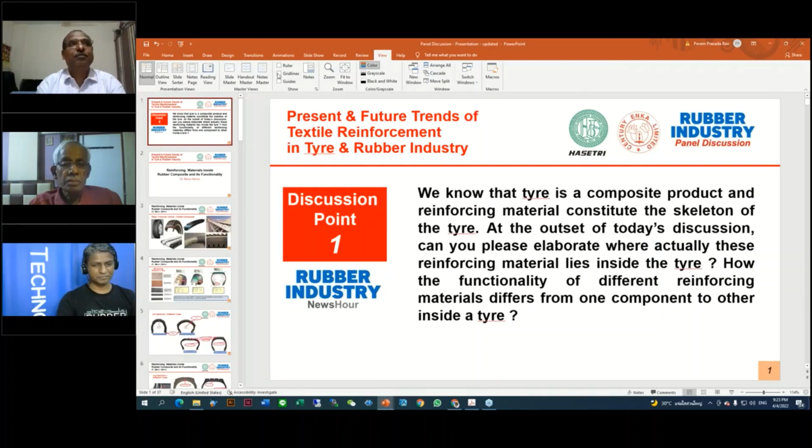Okay, HASETRI is actually the abbreviation for Hari Shankar Singhania Elastomer and Tyre Research Institute. It is currently located in Mysore, Karnataka. It is promoted by JK Tyre and Industries Limited. It is an independent research institute and a SIRO organization. SIRO means scientific and industrial research organization recognized by DSIR, Ministry of Science and Technology.

So HASETRI you can consider a one-stop solution for the rubber and allied industries. HASETRI is over 3 decades old. It has specializations in a gamut of things, for example, materials for rubber and tire industries, and also material developments. Then we have a huge gamut of tests, starting from rubber chemicals to products and full-fledged tires. We have predictive tools like simulations for rubber engineered products. And we also work on consultancy projects.

And being an independent research institute, HASETRI's laboratory is also accredited with ISO 17025 by NABL, the National Accreditation Board for Testing and Calibration Laboratories. So being NABL accredited, HASETRI's test reports are recognized internationally. Recently HASETRI was also accredited as a proficiency test provider. So in brief, HASETRI has a total basket for those who are interested in this field. HASETRI also does lots of trainings, like you also.

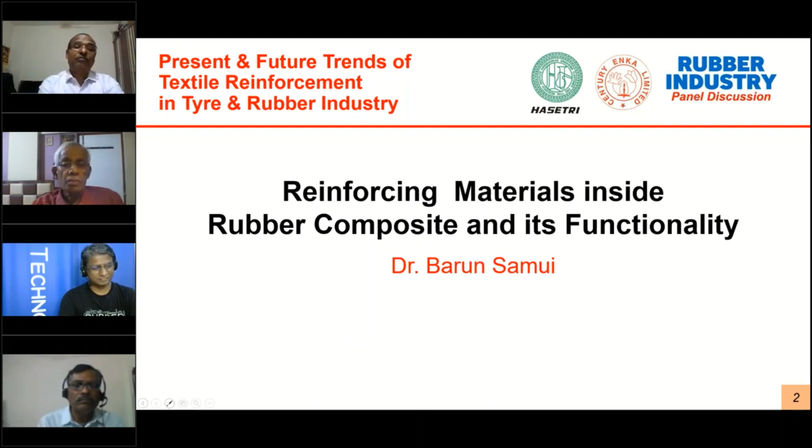We will see at a glance, these are basically some of the key rubber composite products. Today's topic will focus on the tires, but there are other products. So here's the tire, basically a passenger tire. The tire itself you can consider like a tire world. There are 30-40 varieties of tires, and each variety has an altogether different design, materials, performance, finite elements, everything is different. Starting from say a 2 kg scooter tire to a 3-ton OTR tire.

So some of the things are very common, like the reinforcing materials and rubber, but the design aspect, everything is different. So some of these key rubber composites, like passenger car, this is the section. We will discuss more on these things. The V-belt, hose, conveyor belt, transmission belts. We call these all rubber composites, but one common thing we can see even from these pictures is that reinforcing materials are inside them. So some kind of similarity is there.

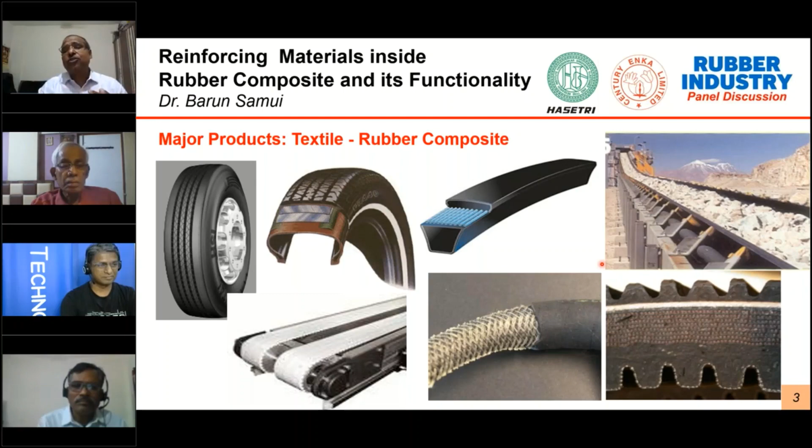So now can we go to the next slide? There we will try to show what kind of reinforcing materials. The left-hand side pictures show our reinforcing materials of today's topic, and these are pictures of the tire, trying to show where the reinforcing material lies.

So the first picture is PCR, passenger car radial tires. So here, how many varieties of reinforcing materials are there? You can see the carcass, because if it is the radial tire, many of us know the textile fabric goes from bead to the other bead in the radial direction. So if you take the longitudinal or the axial rotation, it is 90 degrees. So bead to bead fabric is there.

Over the carcass, there is the belt. It is made out of, primarily today, a steel belt. And cap ply and carcass, these are in opposite type. You know, cap ply is 90 degrees over the carcass, so it is in the rotational direction of the tires. And the other thing I have put in the circle is called a chafer, and I will come to that. And this part of the tire which gets fitted with the rim is called the bead.

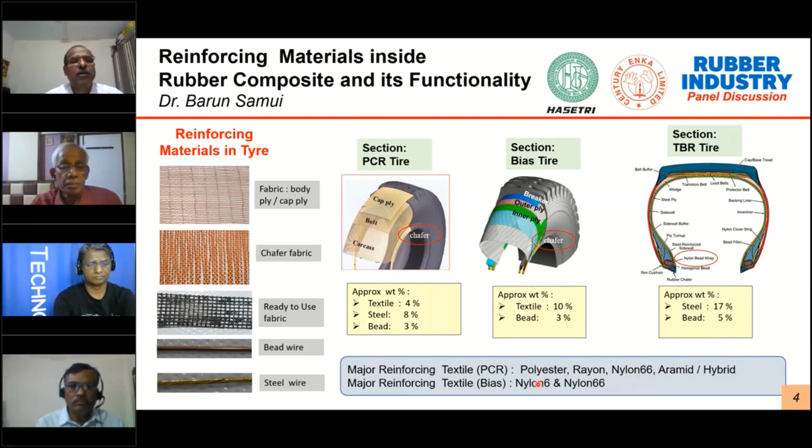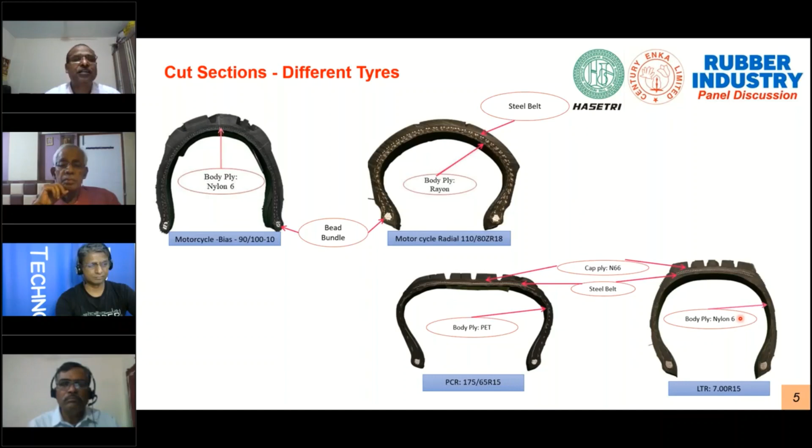Performance of the tire finally depends on this, like this, each and every component. That's the complexity and beauty of this composite that is the tire. So that's the critical role played by the chafer, which is primarily nylon. Why nylon, why not polyester? There is an answer for that: nylon is better than polyester in this particular functionality, because it has to cover that functionality. So each and every thing comes down finally to the answer of functionality.

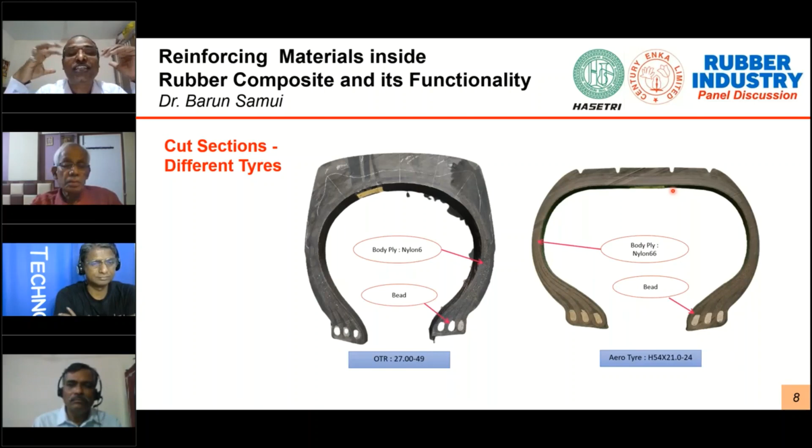When it lands, such kind of smoke and things come out, which clearly tells about the temperature and speed the rubber experiences. At the same time, it finally has to be a total integrity player. I'll touch upon this integrity in the next slide.

Let's go to the next slide. When we have so many requirements into it, broadly you can classify it into two most key and important things. One is durability - the structural durability for running lakhs of kilometers. The other is stability at high speed.

Now where does this come from? If you make a summary, it comes from the integrity of the composites, because in such a dynamic loading-unloading scenario, if the adhesion between fabric and rubber, or between steel cord and rubber, is inadequate, then separation starts between steel cord or fabric and the rubber. Once it initiates, it propagates under dynamic conditions.

In dynamic conditions, with 40-50 million cycles, your integrity has to be perfect, and this integrity is determined by the adhesion of the fabric and rubber, or the steel cord and rubber.

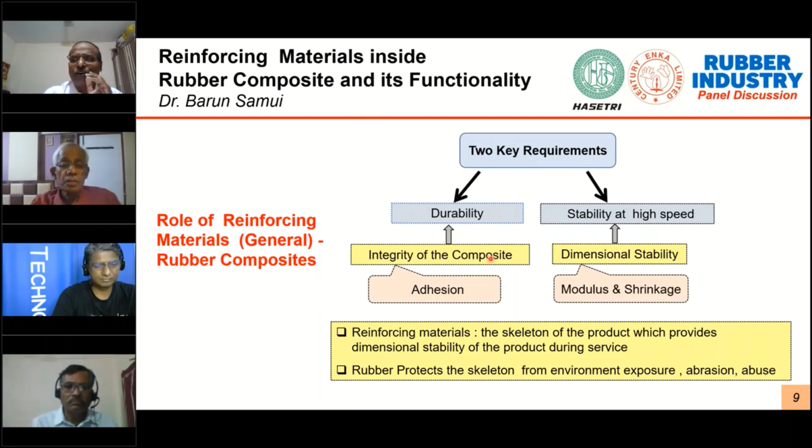So now to summarize what we've discussed - if we ask what are the key functions of reinforcing materials, we've seen where it lies. It maintains structural durability against all kinds of bruise impact. If structural durability is there, only then can you think about retread after the first life, and things like that.

Then the second point - many times we call it a tire that carries the load. If we ask what part of the tire carries the load, it is actually not the rubber. Definitely not the rubber - rubber gives the flexibility. We call it the reinforcing materials that take the load.

Yes, but how? At the next level, if you ask, actually the load is carried by the air inside it. You might have seen, even in your vehicle, if the tire gets a little deflated, you give more air pressure to take the load.

If you look at a truck which is taking 100% overload, they give 15-20% higher air inflation - meaning the inflated pressure is more than the recommended level to handle that overloaded condition. Otherwise it cannot take the load, and there will be deflections. So what the reinforcing material does is act like a container, an air container.

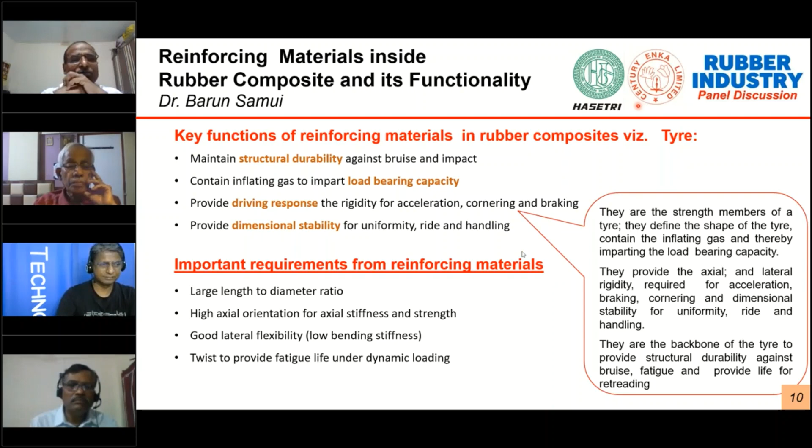I just wanted to touch upon these things. Now I think this is the final slide for coming to this. Can you let us go to the next slide, where we are finally summarizing it.

The next question: what kind of cord properties are we expecting for carcass applications? This is ideal, theoretical, you will not get whatever is listed here. Very high tensile strength, modulus will be also very high, it would be very tough meaning very high impact, it must be highly dimensionally stable. So all these together, we call it a chutney, you will not get all in the same dish.

So there will always be a mix, because it's like God's rule. Among materials like nylon 6,6, polyester, rayon, each has its own positives and its own limitations. Nobody has all positives. So these things will actually be described in more detail by our Narapatida. That's the ideal for carcass applications.

But for the belt, it is again a different set of properties. For the belt, nylon is still the king. When you talk about tire, you can call it amongst all reinforcing materials the dada, in terms of volume, in terms of everything, it's still the highest. And as we go on, radialization keeps increasing. So in India today, it's almost 99% radialization, close to 100% in the passenger segment, whereas in the truck segment it's still around 50 to 53%.

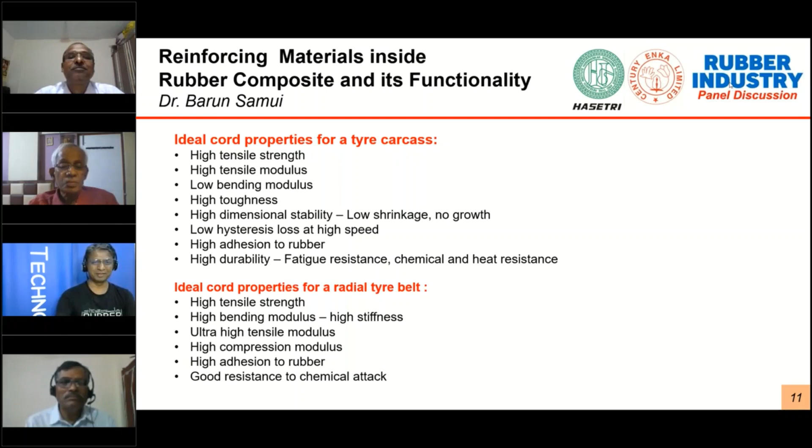Mr. Dhar, would you like to add any additional points? Yeah please. I think Dr. Samui has set everything in motion, and he has touched upon the practicality of all the important points basically, and has proved that he is really a textile person. I do really appreciate it, he has set the momentum in motion now for further discussions.

Yeah sure, thanks Viresh, would you like to add any additional point here? Yeah, thank you Barun, because you have touched on the fabric, how it is useful. I am with nylon for the last 30 plus years, you both have already been in the other industry, but I am with the nylon, I am with the skeleton for the last 30 plus years. Thank you very much, you explained very nicely.

One more thing I'd add to this: all the properties are very well covered, you have covered everything. In the fabric also, because I'm basically in fabric manufacturing, the EPI distribution also plays a vital role in this, especially at high speed. When you go with high speed, the EPI distribution of the cord plays a very high role in the manufacturing of the tire. Thank you very much.

Absolutely, so it's not only just EPI, because I touched upon only the peripheral thing, what materials.

But when it comes to the design of the tire, it's EPI, meaning ends per inch, or EPD as we call it, ends per decimeter. Then what angle it will be at, what constructions of the cord will be there. So it's really a complex kind of thing. Each and every area, or sub area itself, is a mini ocean kind of a thing which gets into details.

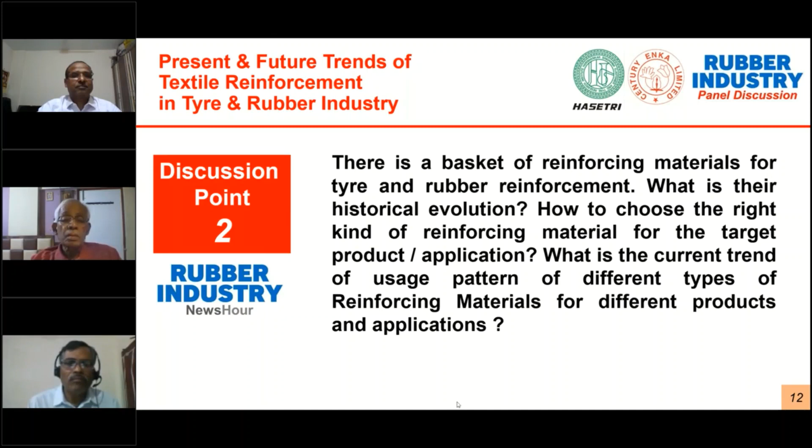Now, if we look into the development of cotton for tires until today, there has been a 100 year gap to reach the stage we are in today. Now, why has it taken so much time? I personally feel the main reason is that synthetic textile development is only a part of it. It had to be supplemented and in line with the development in rubber technology and tire technology. Hence, all three developments have to go together. A single one does not make any sense.

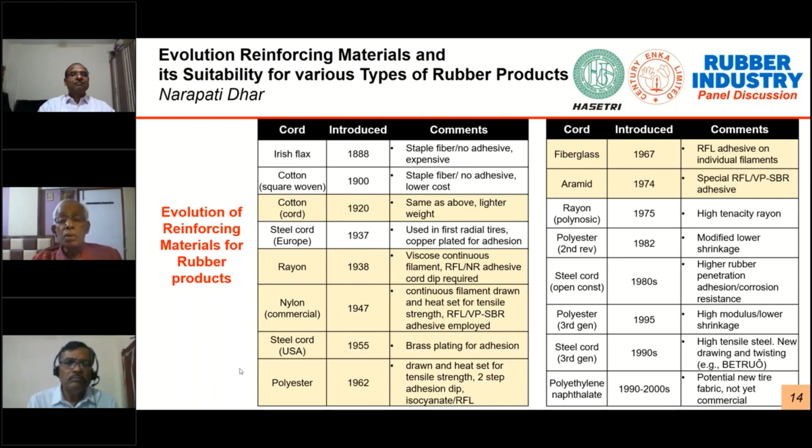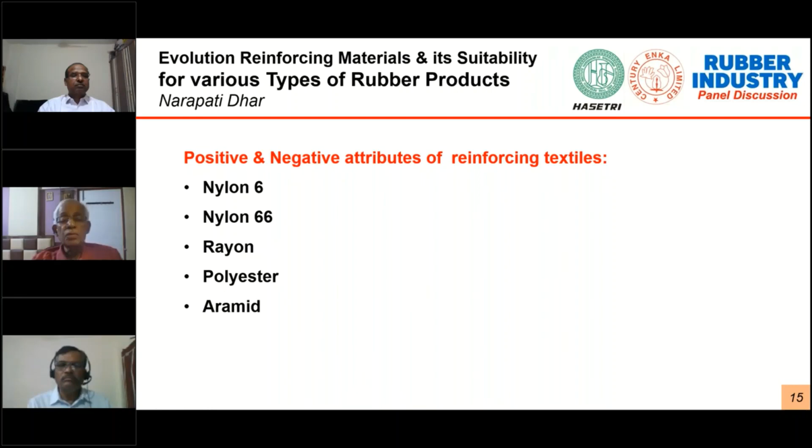Now let us go to individual reinforcing materials and see what the positive points and negative points of each reinforcing fiber are. It is very clear there are 5 predominant reinforcing materials used, not only in India, but practically globally: nylon 6, nylon 66, rayon, polyester, and aramid. Now we will examine each one of the reinforcing materials separately in the next slide.

Now, nylon 6. This nylon 6 has got tremendous advantages, attributes like very high tenacity, very good impact resistance, excellent fatigue, then lower density, which I will explain later in more detail. And above all, it has got very good bondability with rubber compounds, after the dipping treatment. These qualities, including the high tenacity, make it very suitable for bias tires. In fact, to the best of my knowledge, most bias tires are produced today with nylon 6.

And so far as India is concerned, India is in a very strong position so far as nylon 6 is concerned. Here, I'll give you one example of how the paradigm shift was taking place. In my own experience, because I had the development responsibility, I had to visit China, Taiwan, and other South Asian countries. From the middle of the 1990s, China probably was the largest manufacturer of nylon 6.

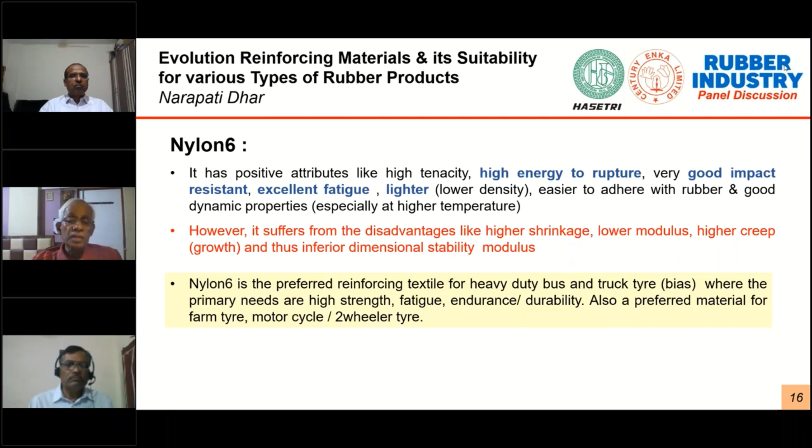Now, it is nylon 66. In short, nylon 66 has got practically all the properties of nylon 6. Additionally, it has got some highly desirable properties. One is it has got a lower shrinkage compared to nylon 6, and also it has got very good thermal stability, which might be to some extent related to the higher melting point or softening point of nylon 66 vis-a-vis nylon 6. Now, this has created a real big difference.

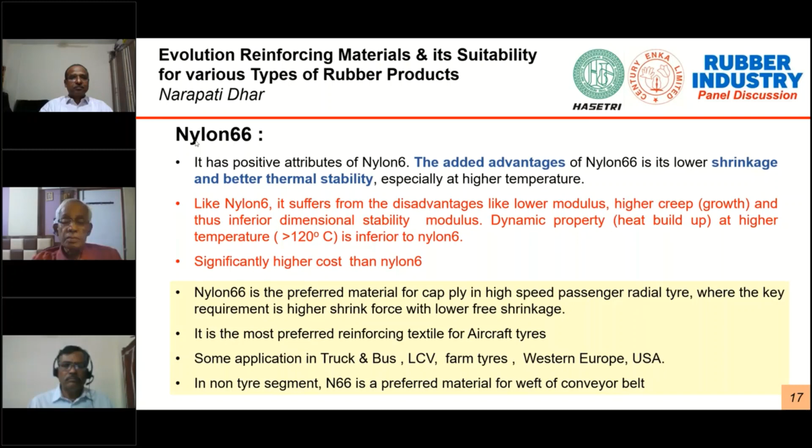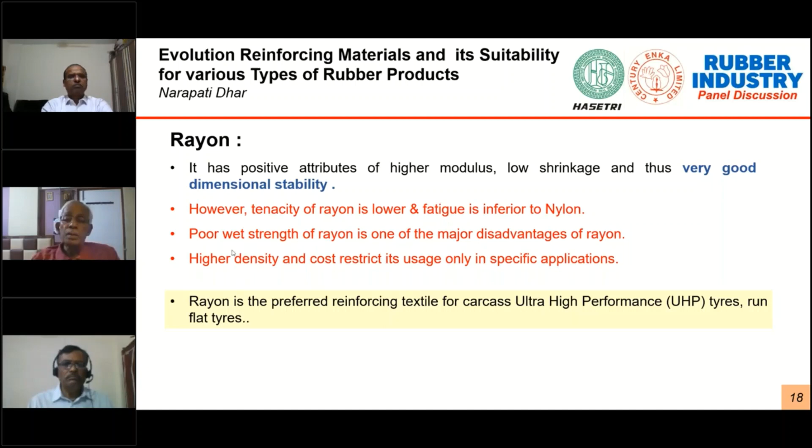Now this is another fiber which is practically ruling the whole world today. Polyester was developed in 1962. As we discussed, HMLS, or high modulus low shrinkage material, was fine-tuned in 1995. Today, that is the only material that is being used. Now, it has got tremendous attributes.

Hence, despite its limitations, probably this is the most popular reinforcing material, especially for passenger car radials throughout the whole globe. Now, here the attributes are very clear. It has got a high modulus, it has got very low shrinkage, and because of which it has got tremendous dimensional stability, which is required for the performance of especially high-end radial tires.

But it has got certain quite serious negative points. For example, inferior fatigue as compared to nylon, and accordingly, because of these fatigue properties, polyester is not used for truck and bus tires. Now, today, HMLS polyester is the ideal reinforcing material for the carcass of passenger and LCV radial tires, and it has got usage in other rubber products or industrial products also.

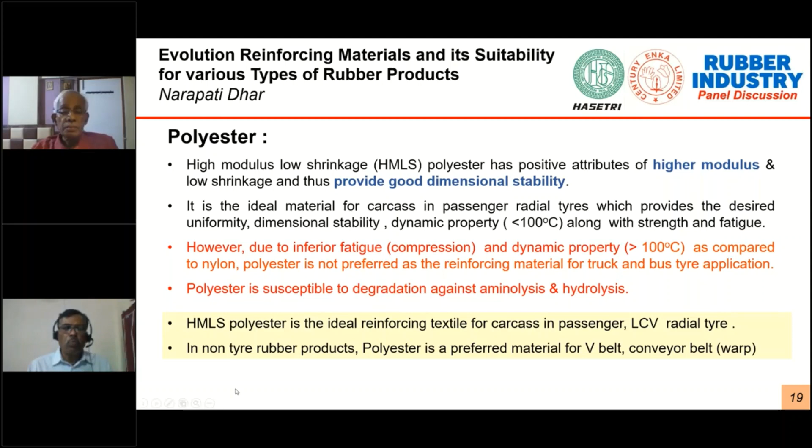Now, actually, out of the series of five, this is the last reinforcing material. Aramid was basically developed in 1974. At that time there was only one plant. Today, of course, there are two plants, and the third plant also is operating right now. Now, it has got unique properties. For example, it has got the highest tenacity or strength in this group of reinforcing materials. Very high modulus, low shrinkage, and excellent thermal stability.

Unfortunately, it has got its own limitations. It has got extremely low elongation and poor fatigue. Another point is, because of the high modulus and stiffness, the processing of aramid is very difficult. It will have to be done under expert guidance, and a lot of precautions are necessary for handling the aramid yarn or fabric. One of the most serious deterrents for this fiber is the cost.

Today, I don't remember, I've not checked it out. I was dealing with aramid some time back, maybe about 10 years back. At that time, aramid yarn price was $20 per kg, and dipped fabric price was 40 USD. Now, I personally feel one of the main deterrents of aramid is the conversion. These companies don't do any conversion of their own. They have got their own converters, mostly based in Europe, and their conversion charges are extremely high.

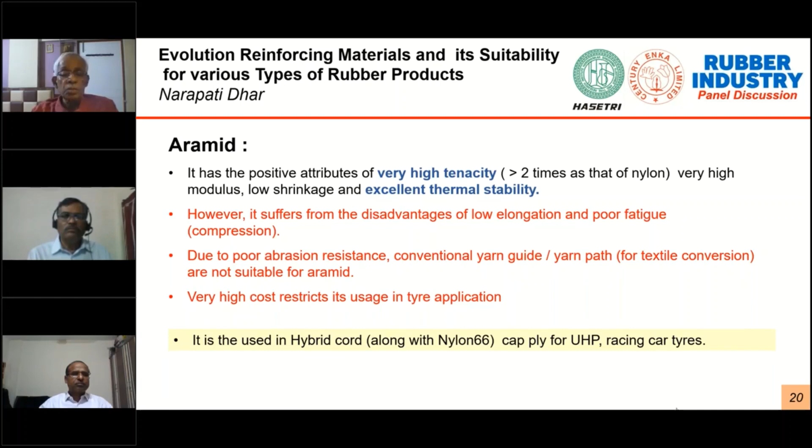Today, I think even in some bicycle tires, I was told that racing bicycle tires use aramid. Some people are using aramid, so they become very light, and it becomes an advantage for them in the race. And as such, this is the discussion on the individual fibers. Now we will go to the properties.

Next, please. See, this is a very, very interesting graph, which is called the stress-strain curve. All these reinforcing materials we have discussed have been included, and it is mentioned clearly. The stress-strain curve is the fingerprint of a reinforcing textile, and most interestingly, each fiber has got its own distinctive curve. In fact, it also proves that each reinforcing material has got its own advantages and disadvantages, and one is different from the other. As such, no reinforcing material has been developed so far which has got all the desirable or optimal properties.

And some people sometimes, jokingly or otherwise, call this graph the ECG of reinforcement fabric. Next, please.

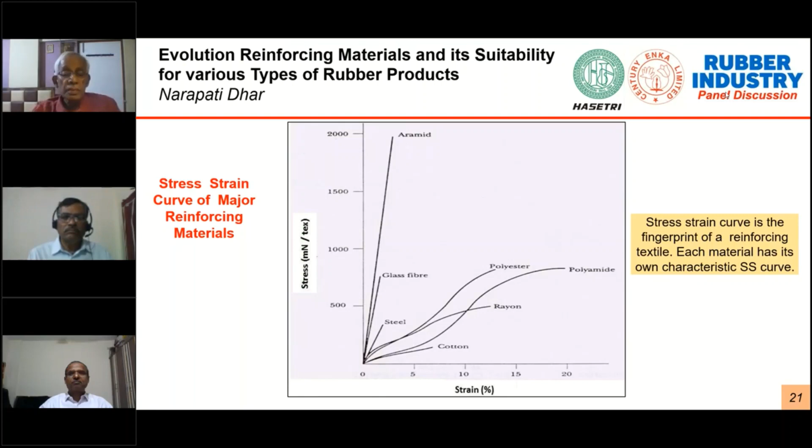Now we have discussed in qualitative terms, but this is a chart which shows a quantitative comparison between the different textiles. Here, a number of parameters are there. On the x-axis are the parameters. On the y-axis is the reinforcing material. To touch upon only a few points which are of relevance.

One is, if we talk of density, we find rayon has the highest density, which is a disadvantage for rayon, followed by aramid. Now, melting point or decomposition temperature: here aramid is the highest. Of course, we are not discussing it here much. It has got the highest, followed by nylon 66, very closely followed by polyester, then rayon, and ultimately the melting point of nylon 6, which is the lowest.

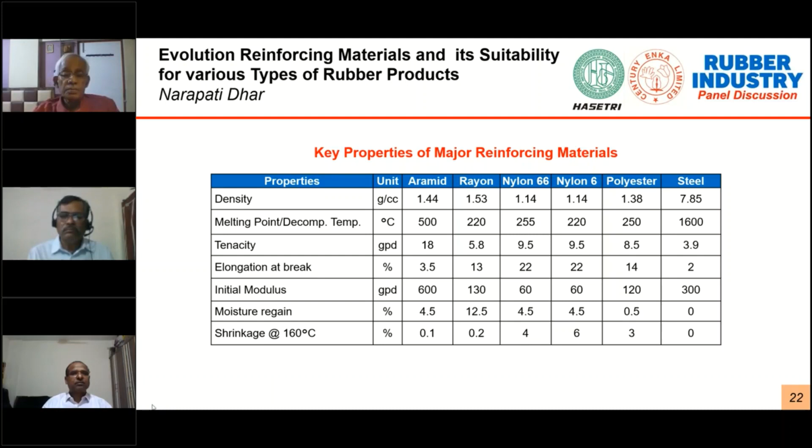Now, this is the last graph. In fact, it is the most important graph. It shows the selection of reinforcing material for our products, that is, currently what reinforcing materials are used for a particular tire. To give an example, suppose it is scooter and motorcycle. As expected, it is nylon 6, 66 or PET. Nylon 66 definitely is a preferred material, but it is not economical.

Incidentally, I had experience of using nylon 66 in scooter and motorcycle tires at one point in my career. The only advantage we were claiming was higher productivity because of the higher melting point, where the curing cycle could be reduced. But because of the cost factor, it did not continue for long. Another reason was that the nylon yarn or fabric we were getting from that company, they stopped their production of nylon 66 in India.

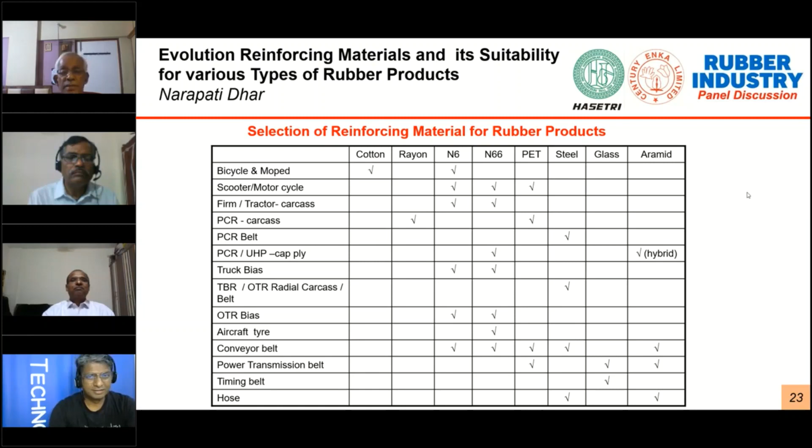Now, with that, I would like to conclude my talk today, and thank you a lot for your patient hearing.

It's very nicely mentioned with all the positive and negative attributes, and also the various reinforcement selection. You put it very nicely, sir. Thank you very much for sharing your insights on this.

Thank you. Mr. Viresh, would you like to add any additional points other than what Narapati has mentioned? Only I want to add this - I think Mr. Narapati has used all the material, whatever he has explained. I think he has covered everything he has used. Yes.

And Dr. Barun, what about you? Narapati covered quite a bit of details. I would like to emphasize only two things. A designer, when designing a product - like we talked about composites, designing a conveyor belt, designing a tire - the two slides Narapati was showing, one was the stress strain curve, the other was the matrix of properties. I usually call the stress strain curve our human body's ECG.

So if you call it really the ECG of a fiber, it actually tells about the character. If you just put that slide in front of you, you can talk for half an hour on that - which one is what, you can characterize based on that. And with this matrix, a designer can pick the right one for which applications. I will now give two examples, and for a change I will not talk about tires, since today's topic is other rubber products.

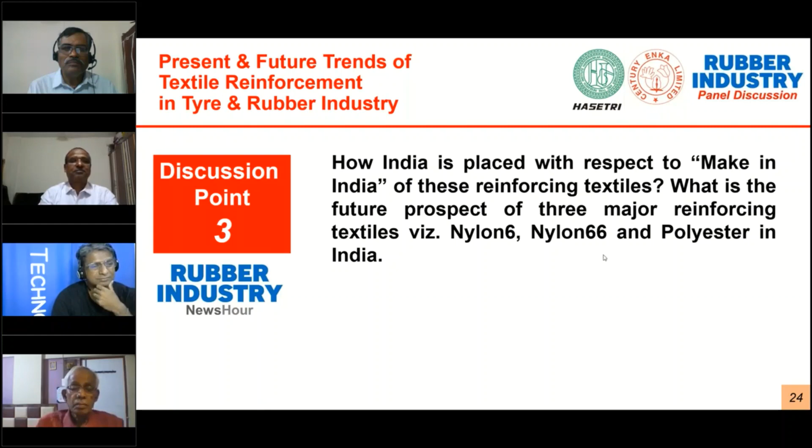And for this, the local industry is well established in terms of reinforcing textiles and has the technical capability to offer international quality material. This has been proven during the last 2 years. Best in class manufacturing technology is deployed by all Indian companies, well established in the area.

We have all these established research institutes like HASETRI. Whatever can be done in the HASETRI, SASMIRA, and further support through industry bodies like ITTA, which is almost 10 years old, is governing and helping this.

This has given confidence to local manufacturers, and capex has been planned for expansion as well as diversification. In my last 30 years of career, I was with nylon 6 only, but in the earlier 2-3 years I touched only a small quantity of polyester and nylon 66. But within just 1 year, we are now handling a very good quantity. Indian manufacturers will come up with nylon 66 as well as polyester also.

And I will cover up the major three. Both my panelists have told how the tire has been made and what properties are selected. What in the end - who is making money out of it? Who is ruling the business? That I will cover up, especially more in India.

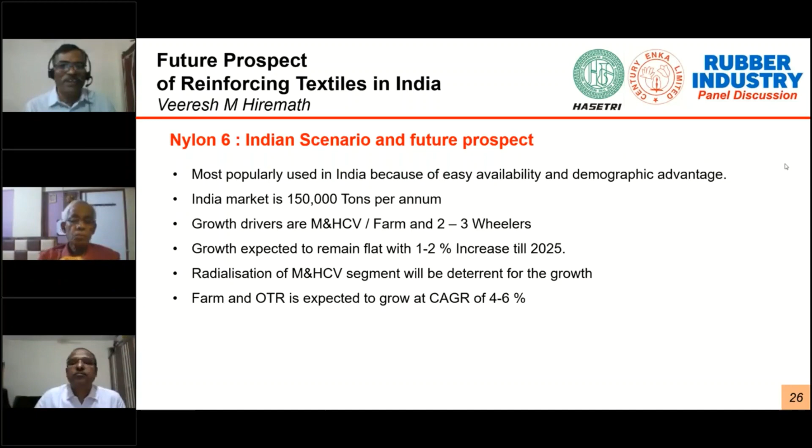I'll touch on nylon 6/6 also. At present we are not manufacturing any nylon 66 in India. This is because all Indian manufacturers are coming up with nylon 6/6 production. The main usage is in the cap ply, as already explained by both my co-panelists - nylon 66 is used in the cap ply in passenger cars. The consumption is around 10,000 tons.

Out of that, around 4,800 tons is for OTR and farm and two-wheelers. As already explained, nylon 66 is used in aero tires, and all defense requirements in India are looking for domestic supplies under the Atmanirbhar scheme. Everyone is gearing up to meet this requirement.

The major hurdle for this segment is consistent availability of raw material, because we cannot go with polymerization of nylon 6/6 - it would require a huge quantity that isn't really utilized here. Therefore, you have to depend on other suppliers for chips, dry chips, or something similar.

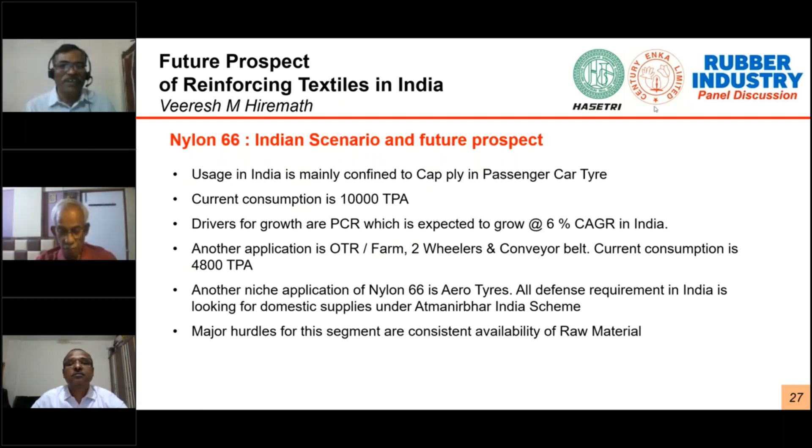Now regarding polyester. I already mentioned that PCR under radialization has gone up to 98-99%. The overall consumption is around 30,000 tons per annum, but nothing is made in India currently. It's primarily used in carcass, passenger car radial tires, and two-wheelers, as explained earlier. Now all tire manufacturers and spinners are coming up with polyester manufacturing here.

Definitely, all tire reinforcement manufacturers are moving toward the latest state-of-art technology. Earlier, meeting cost was the main reason to go for this polyester, because of latest technology and less availability. Definitely India will do much better in the coming years in this area.

Imports are mainly from China and Vietnam, which is why India is looking for expansion in the coming years. Tire industry fresh capex is a main segment, estimating good demand in India from OEM and replacement markets. Especially nylon 6, which has a replacement market share of around 60 to 70%. OEM is looking for steel tire cord. Even with new capacity, the capex, India is able to meet all the requirements of the Indian tire industries.

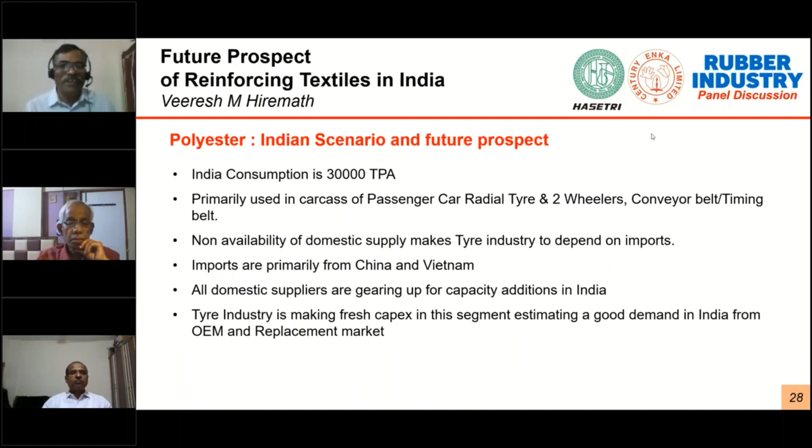Is the price keeping on increasing? It's not increasing that much because of this logistics. All the prices have increased here actually. There is an increase in the price. Both have a similar proportionate increase, because the steel tire cord is also similar, and with the nylon also it is similar. The availability is also one of the main things we are facing here now.

Mr. Hiremath, you mentioned polyester. In the same way, it is for nylon 66. The companies supplying this material are all global giants. For example, the polyester you are mentioning is mostly from Vietnam. Vietnam as such doesn't have any polyester factory. Vietnam is working as a sort of conversion center. These conversion centers are basically of Hyosung, Korea, and Formosa Taffeta, Taiwan. Two of the largest manufacturers in the world.

Secondly, India has a trade understanding with Vietnam and Southeast Asia, where concessional duties are applied. What it basically means is the landed cost of polyester and nylon from these places is definitely supposed to be at a much lower level. Now, you are putting in enormous efforts, and I only hope and pray that you become very successful for nylon 66 and polyester. But the question is how you plan to compete in terms of price.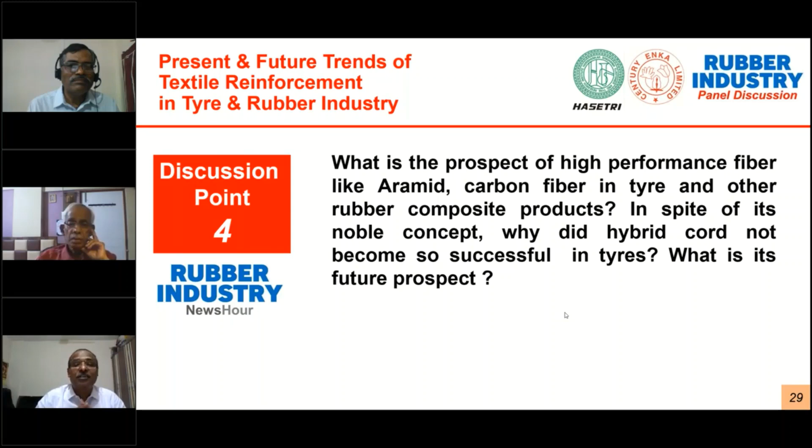next slide, where I touched upon utilizing the two most positive attributes of aramid, that is what? Strength to weight ratio, that's called the tenacity, and the excellent dimensional stability. I will use the word outstanding dimensional stability, because if you remember the shrinkage in the table of the para-aramid, it was close to no shrinkage, 0.1.

And at the same time, modulus was extremely high. So excellent dimensional stability, but still it could not find that much use in tire products, because of the fatigue and the low elongation and impact. So how to minimize these limitations? Then this concept came, called hybrid.

So there is a difference between hybrid and blending. You are a rubber man, so blending: you are blending NR with SBR, or BR with SBR. At that level, in the mixing stage, you can do it. But in case of yarn, when you made it, the physical entity is there. So hybrid cord is basically physical. It's not a blending. The physical yarns are there.

When you talk about a cord which is made out of 2 ply, here 1 ply is made out of aramid, while the other one is another fiber. Now the question is how to choose the other fiber which can mitigate the limitations of aramid. And at the same time, you have to remember, this is also an engineering thing. Which one to choose? You have in your basket nylon 6, polyester, and nylon 6/6 also.

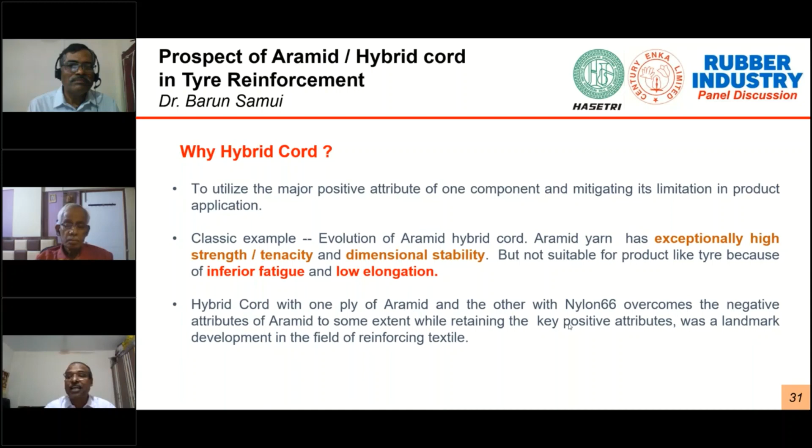But in spite of doing so, still it has limitations. It cannot replace polyesters, it cannot replace 100% nylon 66 for applications like bias tires. If you put even this hybrid cord in a bias tire carcass, it will be disastrous, and put it onto a road like Indian roads, it can't. Still it will not. But it finds its applications for some applications.

As I was telling, being a tire designer, you have to choose from the basket depending on the component where it suits. So for example, in the cap ply over the steel belt, as cap ply applications, these hybrid cords today are being used for ultra high performance tires, racing car tires, etc.

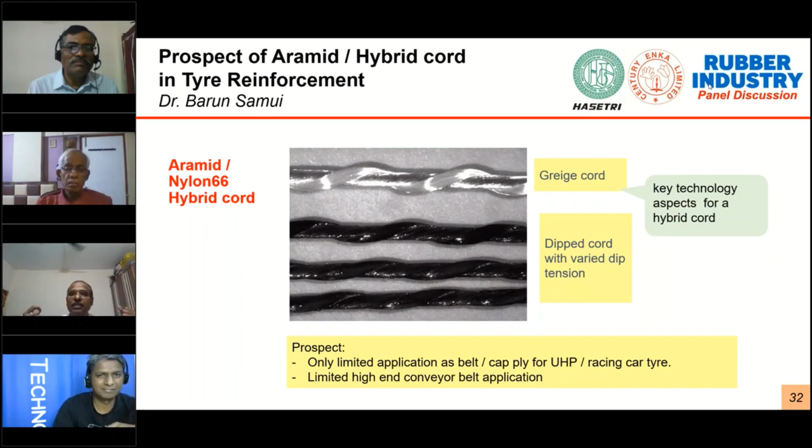So I hope, Piram, I tried to touch upon it. It has excellent, outstanding properties, but you can't do that. It is too much for that. You do fiber physics and you are able to do something, but still it has some limitations, right?

That's all. Yeah. How about cost wise? Okay. Cost is several times per kg when you talk about aramid compared to nylon, right? And polyester, again, you have to multiply by another 1.5, 1.7, because polyester is the cheapest material. But you may think that means aramid has not too much of a future. Yes, it has a future, but not in tires. That I already told about.

It has many other applications. High performance, bulletproof jackets, there the dominant players are aramid and ultra high molecular weight polyethylene fibers. Yeah. Is consumption increasing over the years? What is it like now? Over the years, yes, it is increasing, like mechanical rubber goods and hose applications. There are some special thermal applications, like what Darda was mentioning about hoses in engines at very high temperature. Those are very high end and special applications where the product manufacturers can take that cost because they are going to get money from that product.

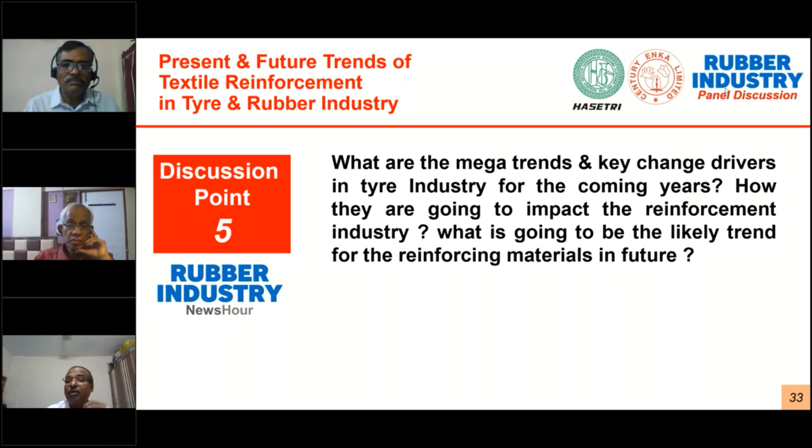So whatever we talk about a trend, you will find there are linkages, and I tried to put those linkages, how they determine the future of reinforcement materials and reinforcement textiles, briefly. I have only 2 slides to show you. Let's come to the next slide, where I am showing the mega trends or future trends of tires. Now here, one very interesting point has come. Not only across the tire industry, not only in the automotive industry, it is everywhere. That word is sustainability. Whatever we do, we have to do in a sustainable way.

So what is the definition of sustainability? The key: you use less, consume less. That's one thing. The other one is from your existing things, how you are going to recycle, reuse, and regenerate, renewable from nature. I am talking about the bottom one. So this is the layman's understanding of sustainability. But another big factor is coming on the environmental front: less carbon generation. We know automotive is directly related to carbon generation and pollution. Then is there any relation with the tire?

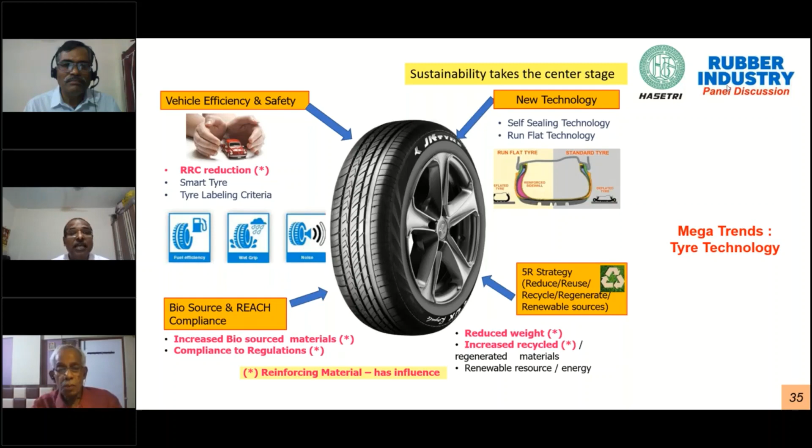They are researching how to move more towards bio-sourced materials while complying with REACH regulations. There are a few chemicals which are hazardous in nature, and they are working on this. So all four aspects I highlighted here involve significant R&D to come up with solutions to meet future demand. In my second slide I want to emphasize what is going on at the R&D level and what has moved from R&D to the industrial phase. So let's go to the next slide.

This is the intermediate one, following the previous slide, from vehicle to the future. Before the last slide showing the future, this one talks about vehicle to tire to material linkages. And Peram, you remember you asked me about the EV part; I told you to wait for some time. So here, if you look at the vehicle trend, from IC engines it is moving to EVs. So look at the tires also.

There are concepts called narrower and taller, and sometimes the other way round also. If you look at electric vehicles, what are their specialties and what are their needs? It is going to be a heavier car, right? The same capacity car is going to be heavier because of the battery.

In an electric vehicle, it needs high torque, especially at the initial torque, and high accelerations, which leads to high torque. It is going to be a very silent car, much more silent than an IC engine car. Safety is anyway there too, with high acceleration, high speed, and things. So these are the specialties for the electric vehicle.

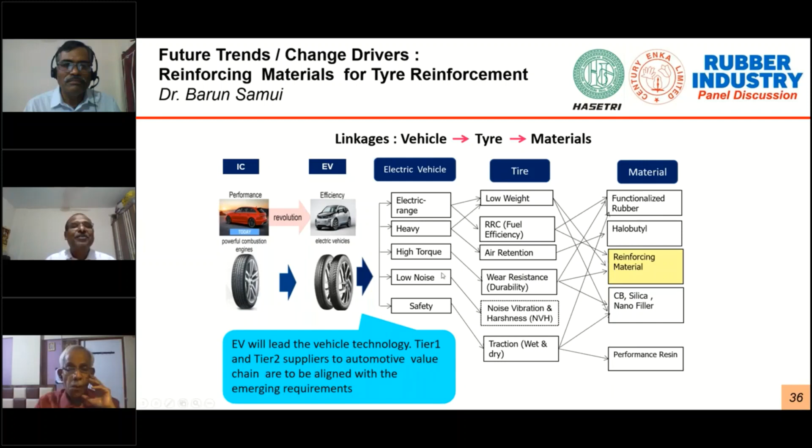So this is the thing I touched upon already. Lighter and stronger is one of the key buzzwords towards lighter weight, so towards higher tenacity. HT is high tensile, ST is super tensile, UT is ultra tensile. These are terms used for steel cord, but conceptually it is there in textile also. For example, take polyesters, what Dharda was telling, the third generation. So we are talking now about fourth generation, fifth generation also.

So those are at the R&D level, somewhere coming at the industrialization phase also. HMLS stands for high modulus low shrinkage, that is highly dimensionally stable polyesters. So towards a higher tenacity further, it is called HT-HMLS: high tenacity, high modulus, low shrinkage. So you are retaining that high dimensional stability, at the same time getting higher tenacity polyesters. These are all the developments going on with polyesters.

Now I would like to emphasize here on polyester. Polyester is the only polymer under the sun which has the maximum flexibility into it. Here the basic fiber chemistry, the backbone polymer chain remains the same. The polymer monomer and the polymer don't have differences. Through molecular weight and the morphological structures, you are getting lots of varieties of polymers.

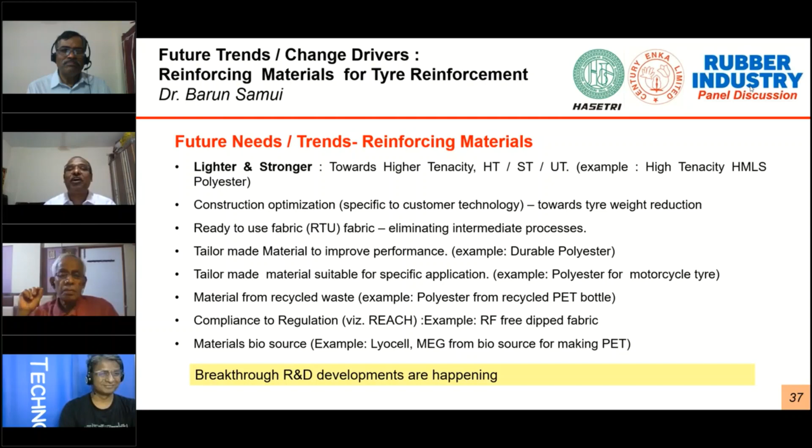Well, it's a really interesting discussion. We covered a lot of things. We actually started with the beginnings about what is there, where it is, the reinforced material, what is the function of it. Then we looked into the evolution of it. Then we got into the application and selection, and also the Make in India project. Then we entered into hybrid reinforcement. Then we got into future trends. What are the trends in future? Well, I think we covered this discussion pretty well.

I know it is definitely longer than expected, but we need to justify the title, right? We need to justify what you want to cover in this. I think it looks like more than a 2.5 hour session. It's a really nice discussion today. I'd like you guys to give some final remarks to the audience, not exactly a summary, but give us what we discussed.

May I ask Barun first, please? First, for this extended session, as you rightly said, it was so lively. Still, we stayed glued to the seat and continued. Of course, we find here quite a lot of audience are still there, so I must express my sincere thanks and gratitude to them also. I hope their presence indicates that they also found it interesting, so that way we feel satisfied. My sincere thanks to the audience.